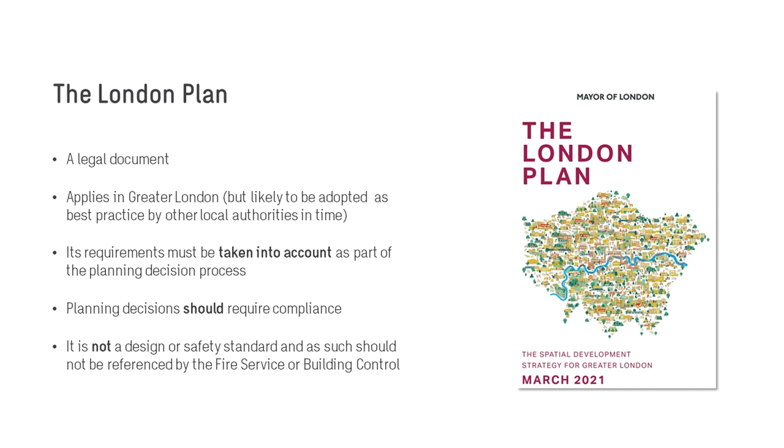In my experience, what's happening in London is not that. Everyone's quoting it as a standard: you've got to comply, you won't get planning without it. And therein lies some of the challenge. Because it's been quoted, we've got variance in understanding of what it is actually asking us for. Its current form is the form that's causing some challenge and some debate for the lift industry. In the foreword, we've got a nice picture of Sadiq, looking professional and mayoral, and it talks about this fantastic piece of consultation they went through with tons of different stakeholders, asking opinion on how to form and develop this London Plan document.

And I think from the lift industry, we all kind of went, consultation? Well, we haven't heard of this thing, where's this come from? And it comes back to this point we've touched on in a number of presentations today, that it is hard as an industry to find the time to comment on draft standards and draft guidance and draft legislation. But if we don't find the time, it only causes problems. And then we have to find the time, because we spend more time debating the problems caused by us not finding the time to refine the guidance before it was published.

If we start to dig into a little bit more of the detail, then you'll start to understand why it's causing some challenges. In the discussions that we've had, and Nick and myself have been working with the GLA on this and trying to refine the guidance, we're all fully supportive of what it's striving to do. It is striving to achieve the highest standards of accessible and inclusive design. And it's trying to incorporate safe and dignified emergency evacuation for all building users. The word dignified there is really important.

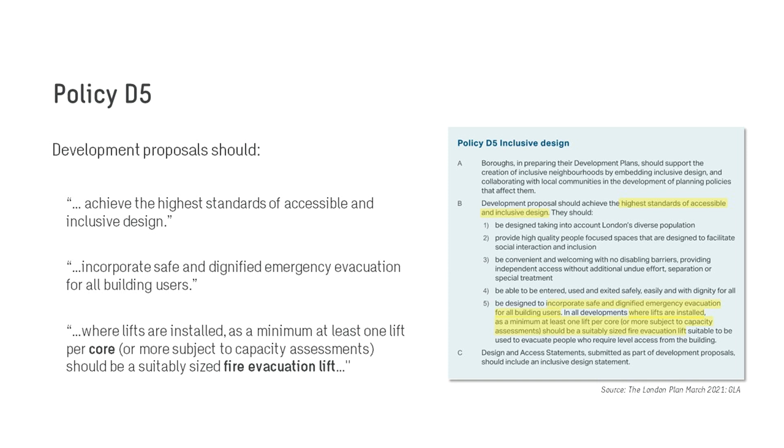The third quote here that's coming out of this overarching guidance is where we start to have some problems. So it says, where lifts are installed, as a minimum at least one lift per core or more, subject to capacity assessments, which is the idea that Gina was talking about just now, should be a suitably sized fire evacuation lift. That sounds okay. What's a core?

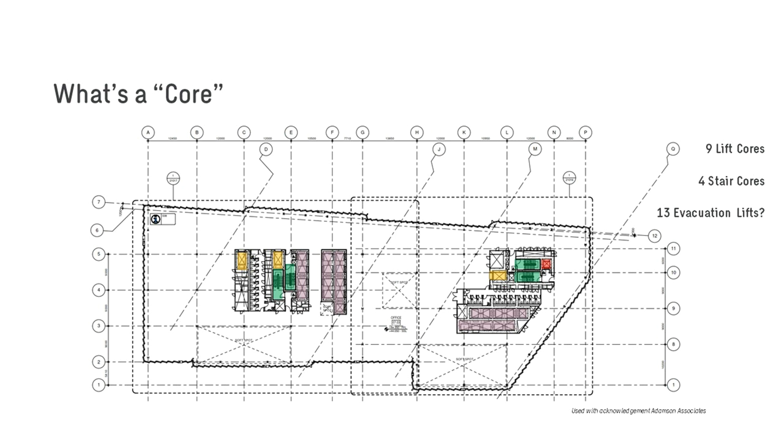The other thing it asked me for was a fire evacuation lift. Well, in the lift world, what's that? Is that a firefighting lift? Is that a firefighter's lift? Very different things. Or is that an emergency evacuation lift? We're not sure. And I think as the industry, we've been engaging with the GLA to say we're fully supportive of this. We think it's a fantastic direction of travel for design, but we don't quite understand what you want yet. And some of that misunderstanding is coming out of the use of language that isn't, in our opinion, precise enough.

How do we design and commission a fire evacuation lift? Some of the documents that Nick was referring to earlier. We've got on the left Part 72, the firefighter's design standard. We know what that is. If somebody says to us, I need a firefighter's lift, as the lift industry, we know how to design that, we know how to install it, we know how to test it, we know how to commission it.

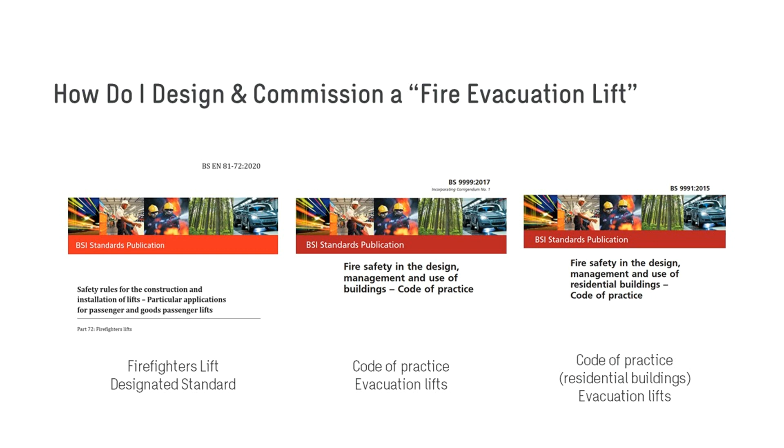Likewise, an evac lift. We understand evacuation lifts, as Nick was saying. We've got that. BS 9999 Annex G tells us what an evacuation lift needs to be able to do. And then we also have, within the Code of Practice 9991 for residential, some commentary on evacuation lifts in there as well. So again, this idea that if the London Plan was a bit more precise, then we as an industry could respond and understand what it is you're asking us to do.

So we read through this London Plan and we say, okay, we understand you want something and you're calling it a fire evacuation lift, but can you tell us any more about it? This bottom piece that's highlighted here says a fire evacuation lift shall be suitable for the purposes intended, and it points us at another document, so yet more documents. This document is called Policy D12, and it's about the fire safety piece. So the whole evacuation lift piece, whilst it says safe and dignified access and egress for all, is really looked at in the context of fire safety, and to the comments made earlier in today's discussions.

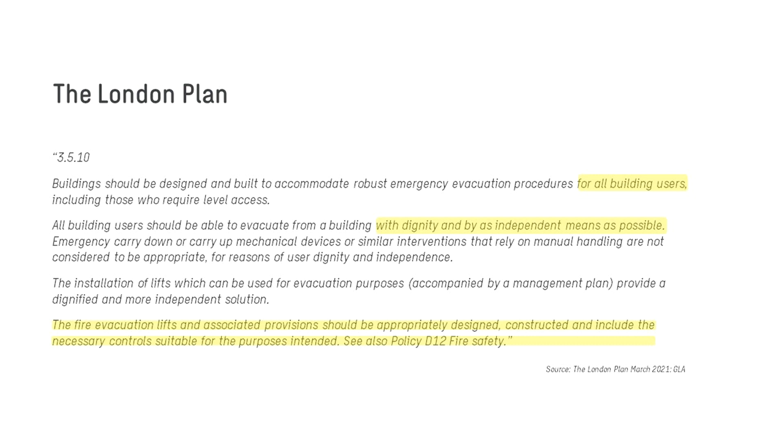It's still out for consultation. And to this earlier point about us trying to engage to help refine guidance and avoid problems, on the 20th of June this consultation finishes. So there is still a window of opportunity to influence what's being said in this document.

Who is the guidance for? So within this fire safety guidance, there's another policy that is the one that's the focus for us in the lift industry, policy D5. And this is the one that tells us what the London Plan thinks an evacuation lift is. And I think there's a really important principle here that again touches on this idea of competence that we've been talking about, and Phil and his chartered engineering credentials, and Gina mentioned it in her presentation in terms of the London Plan requiring fire safety assessments to be done by professional, qualified, and demonstrably qualified fire engineers.

I think it's really important that we in the lift industry understand what we are competent and expert in, and as importantly, what we're not. And we don't stray into areas that we're not, particularly when they're related to fire. I think that's a very, very important point that we need to recognise. And I think there's a danger in this stuff that we start to stray into areas that aren't our responsibility or our expertise.

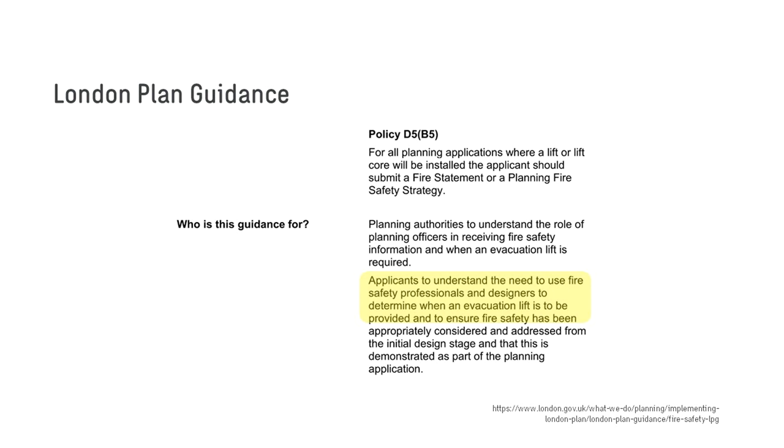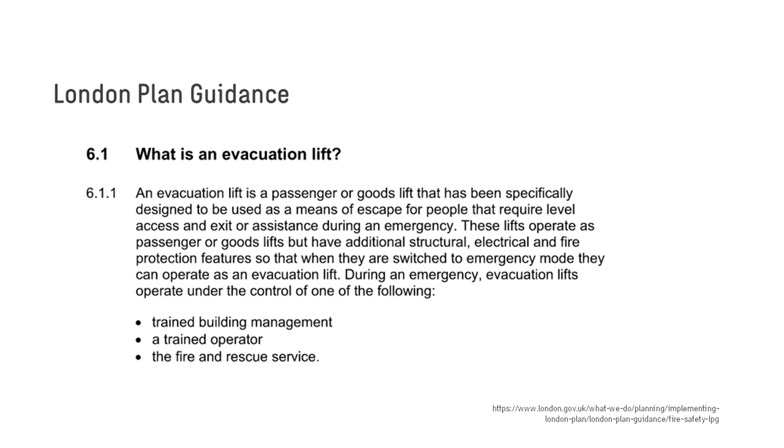The London Plan guidance then starts to give us a bit more detail about what it thinks, and a lot of this starts to align with some of the stuff that Nick was talking about earlier, and that's because Nick's been lobbying the GLA to improve the pre-consultation draft guidance, and we're getting closer and closer. So it talks evacuation lift is a passenger or goods lift that's been specifically designed to be used as a means of escape for people that require level access and assistance during an emergency, and that they have additional structural, electrical and fire protection features, so that they can operate as an evacuation lift. So I think we recognise that in the industry as the principles that were in the old Part 8 and that have been taken through into 9999's Annex G.

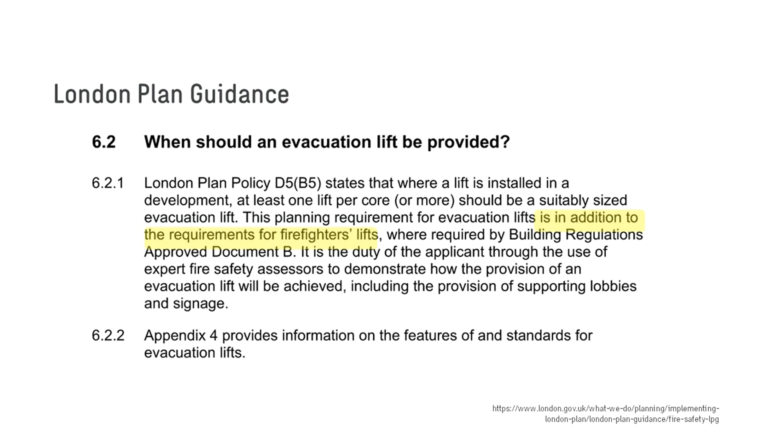The London Plan guidance talks about the need to demonstrate the suitable provision of evacuation lifts has been incorporated into the development, and that the fire statement, or the PFSS, should include a capacity assessment, evacuation strategy, lift management plan, and a declaration of compliance. So again, that's talking about the fire statement, which it says has to be done by a professional, competent person, and within the fire statement needs to be a capacity assessment.

I think it's the capacity assessment piece where we start to stray into the lift industry, where if I was a fire engineer, and I've chatted to some of our fire engineers, they say, you know, I can tell you what the requirement might be in terms of I want to get everyone out of the building in X time, but I can't really simulate how the lifts might be able to do that or not. And I think that's the piece that we can help with.

So again, I guess our declaration of conformity is a legal document. This will be a legal document for fire engineers to make a declaration that their design complies to the legal requirements.

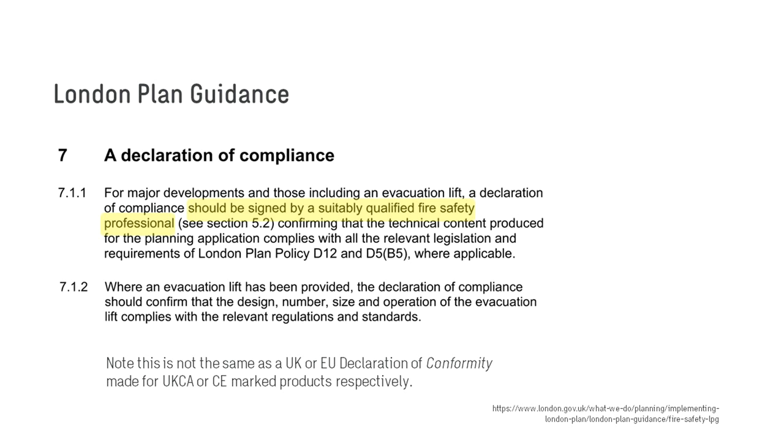Appendix 4 starts to give us a bit more detail. Unfortunately, that first point still says one lift per core. It doesn't yet say what the core needs to be. And it starts to say a suitably sized evacuation lift. Well, what's that? And that starts to play into some of Gina's content and slides on what that might be, and I would suggest even what that demand and the mix is.

As a lift industry, I might be saying, I don't know. You're the access consultant, you're the fire consultant, you tell me what I need to model and I'll tell you how many lifts and how big and what speed they need to run at.

A412 at the moment says there are currently no published standards for evacuation lifts. Well, I think we've seen this afternoon that there are. And we know BS 9999 exists. So there's, again, some problematic wording in there.

There's a table in here that compares evac lifts against firefighters' lifts. And the very fact that this part of the standard talks about firefighters' lifts is down to the lobbying and the work that Nick has done with the GLA. So we seem now to have got rid of this problematic term fire evacuation lift, and we're now talking in language that the lift industry understands better. A firefighter's lift, I know what that is, that's a Part 72 lift. Evac lift, I know what that is, it's a 9999 lift at the moment.

But then you look at that highlighted word there, goods lifts, well, 9999 doesn't like that. You have a firefighter's lift that's actually formally recognised as a goods lift. So again, that's potentially problematic. You can imagine that discussion with an architect. They're saying, well, we're going to use the goods lift as the evac lift, and we go, oh, you can't do that, or you shouldn't do that, because BS 9999 as a code of practice says you shouldn't do it.

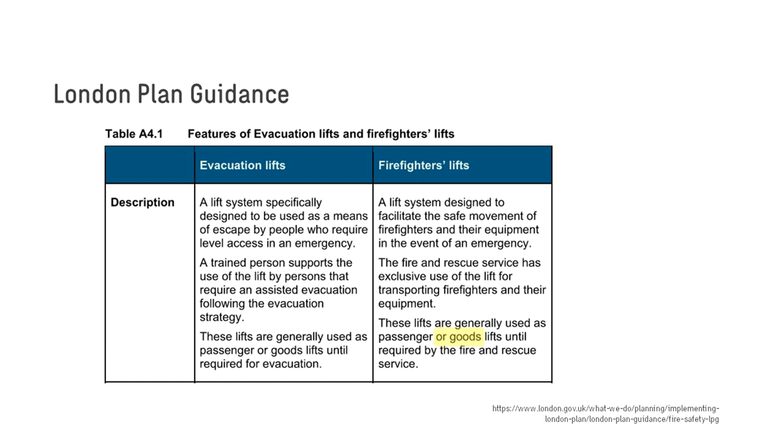It then talks about some other key features of the building design that we recognise: a fire-protected lift shaft, safe lobbies in front of all the lift entrances, smoke control measures, separate power, all the things that we recognise as part of an evac lift. Again, the yellow highlighted piece at the bottom I think is really important, this provision of a management plan.

But again, from a lift industry perspective, I would be saying that's outside of my expertise. You tell me what particular control functions you might want on this lift. We can come back to you and respond whether we can do that, and ultimately what the price is, etc. But inputting into that is outside of our expertise, I would suggest.

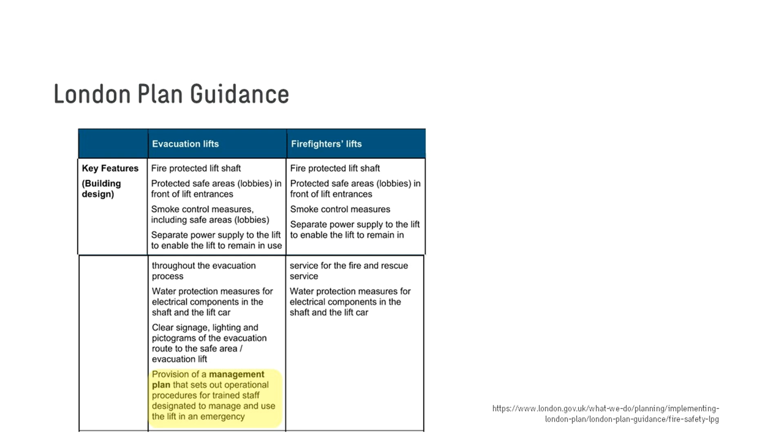It then starts to talk a little bit about the lift requirements themselves, and again, nothing that's particularly controversial or unusual. There's a piece here about size, and again, it talks on the firefighters column with some problematic words there, minimum lift car size specified, and then it talks about two options. It doesn't talk about kilogram rating, it talks about numbers of people.

It potentially conflicts with the minimum defined in Part 72, and it's all these little details, and you might say they're not important, but they provoke debate and discussion, and that costs time, and time is money. And why wouldn't you, on a piece of guidance as important and significant as this, go through the final steps and refine the language as best you can to remove that opportunity for debate and discussion. There's an interesting piece here on the evac lift side of this, where no lift size is specified.

And we've had a discussion with them saying, well, wouldn't it be great if we could actually have a minimum lift size that we think is the appropriate size? And back to that piece about the capacity assessment, I think that would be really interesting. Maybe there's some kind of parametric equation you could do, Gina, to find the optimum shape of a lift car so your jigsaw algorithm works in the most effective way.

One for Richard, maybe. But it is interesting that I think there's stuff in the HTM, the Health Technical Memorandum guidance, that talks about recommended sizes for evacuating hospitals and things like that. We've got that. It's never been clear to me, the clause in Part 72, the firefighters lift standard, that says where expected or anticipated for use of evacuation, it should be a 1,000 kilogram deep car, 1100 by 2100. But how does that play? Should that be what's in here, 11 by 21? So again, we think it might be useful to have some information in there.

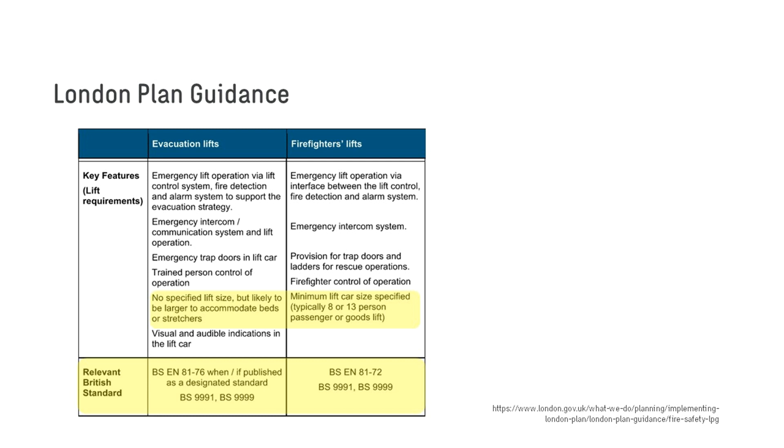But if we take that approach to a commercial building, I can see this being a bit problematic, because typically the only lift that runs in a protected core in a commercial office building layout is the firefighter's lift. But then the London plan says we can't use that as an evac lift, you've got to use something else. So if I then say, okay, I'm going to use one of my front of house passenger lifts, which seems to be the preference at the moment, then all of a sudden you've got a lobby at every single level and it's fire protected.

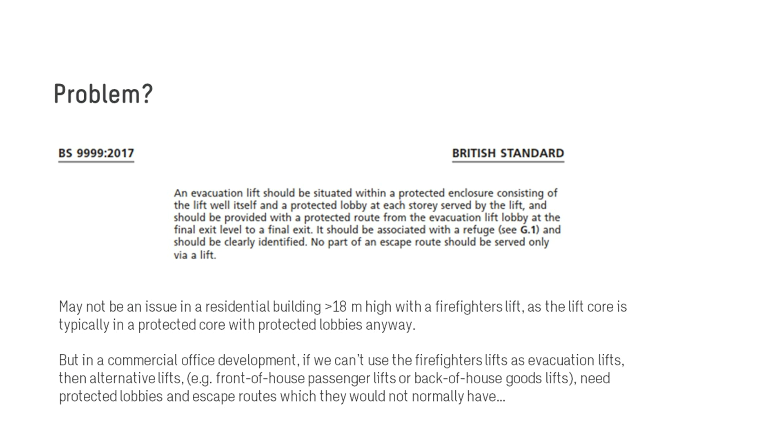And you take that 13-person deep car, well, you might get that as a minimum in certain residential buildings, I guess, for the movement of furniture and stuff. But in maybe smaller developments, if all of a sudden you're saying the lift needs to be significantly bigger because it's an evac lift, and by the way, my capacity assessment says I need 2 of them, oh, and by the way, my fire engineer says I need 2 stairs as well. Before long, the developer's saying, well, I can't afford to build this, and they walk away.

So my thoughts on some of where we are and maybe where we need to get to. I think, as I touched on earlier, as an industry we need to be very careful with scope and liability. And I guess this has come home to roost dramatically in the fire engineering world at the moment, obviously because of the tragedy of Grenfell and other issues. But this piece about competency, I think, is only going to become more and more important, and the need for us all to recognise what we do know, and as importantly what we don't know. And even if we do know things outside of our core industry, don't step there unless you're being paid to step there and you're insured to step there and you're competent to step there.

This declaration of compliance, I think it's important that we recognise that that's not a lift industry document. We may have a part to play with our capacity assessment expertise, but it is not our document, it is not our process. We'll support it and understand what we can do to help, but it's not our document. This piece about capacity assessments, picking up on Gina's piece, those should be completed by competent persons within the lift industry, but possibly assessing demand that's defined by others, in terms of what that mix of disabilities might be. And I think from the industry side, we should clarify at the time of tendering precisely which design standards or codes of practice the equipment is to be designed and commissioned in compliance with.

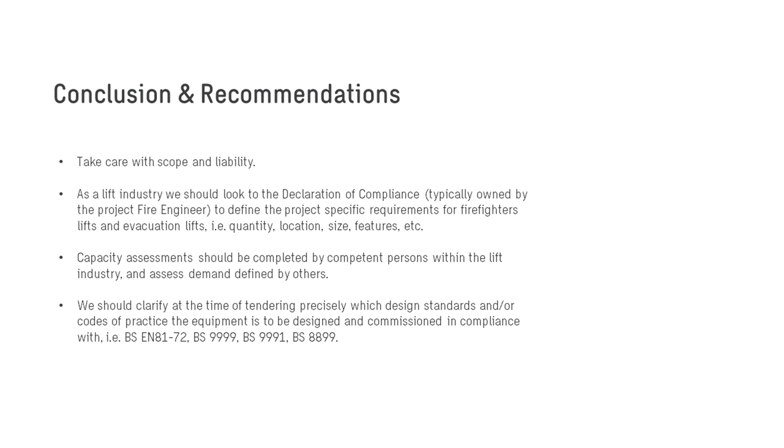We've gone through a job recently in London where the fire engineers wrote firefighters lift, and we said, well, it doesn't run in a protected core. And they said, oh yeah, but it doesn't need to. So we said, well, it's not a firefighters lift then, is it? And they said, well, it is, but it just doesn't have a protected core. So we said, well, what do you want us to spec? Is it a Part 72 lift? Because if it is, then I'm sure that the tester is not going to sign his declaration of conformity because it doesn't comply to some of the principles of Part 72. So I think there's some real problems there if we're not focused on the detail of what we're being asked to provide. Final slide.

These guidance documents are still in consultation, and they're significantly improved from the pre-consultation form, but in my opinion, and I think maybe Nick would agree, there's still another final step and revision to do. It requires continued input from the industry. We have had some very successful recent calls with the representative team in the GLA. I think a surprisingly positive call in terms of that they had listened, they had made changes, they're welcoming the support and the engagement that we're providing, and there's an opportunity there. And I guess the confusion that has existed, that hopefully will disappear, in my mind is encouragement for us all as an industry to try to make sufficient time to comment on these draft documents.

Now the next big one is clearly going to be Part 76, hopefully this month. I don't know how long we'll have as an industry to respond in that public comment process. Maybe Nick can talk a bit more about that in the Q&A session. But the opportunity is still there to influence the London Plan document. The guidance is open until the 20th of June. This slide deck provides links to the documents. And we're getting there, I think.